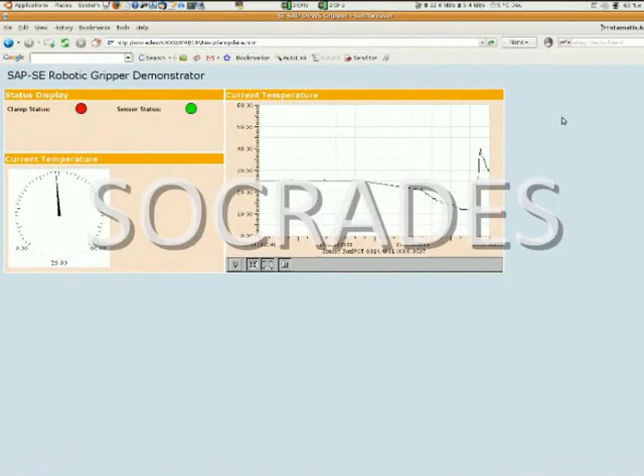SOCRADES is an innovative research project, partly funded by the European Commission, that pushes web service technology down to the lowest layer of embedded software with a focus on the industrial automation domain.

The project brings together a unique consortium of three major competing companies in the field of automation technology: Schneider Electric, ABB, and Siemens. Further, SAP, as the global leader in business applications, ensures close coupling of manufacturing with back-end business applications. In strong cooperation with academic thought leaders and highly specialized SMEs, this project defines new methods in hybrid automation by integrating resource-constrained devices to powerful back-end systems using web services.

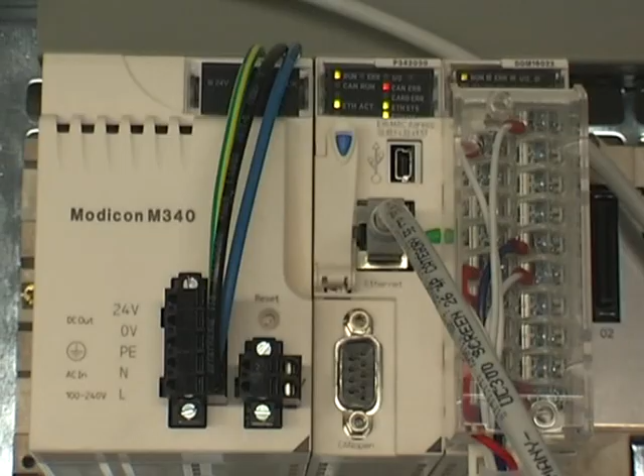Numerous communication standards exist today for the devices on the shop floor of a manufacturing company. Various protocols are used at different levels: between the sensors and actuators within a machine, among the machines that form a production line, and between production lines of a plant.

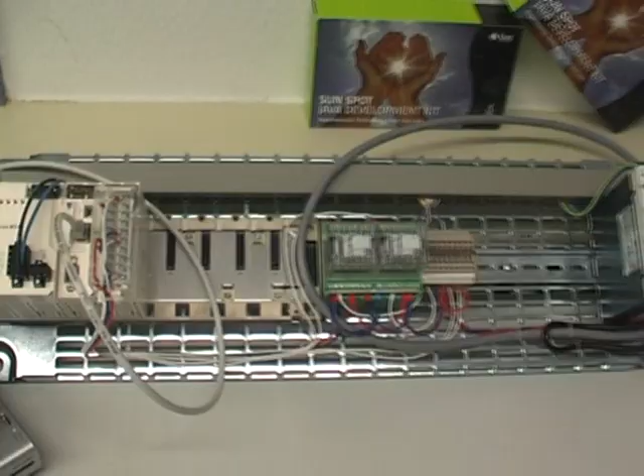Additionally, there is an integration gap between the production processes and the business processes of a company. Currently, this gap is addressed by proprietary connections using human integration, file transfer, or sending messages of homegrown formats. This creates inflexible interfaces that need to be maintained at high cost as the company adapts to changing market needs.

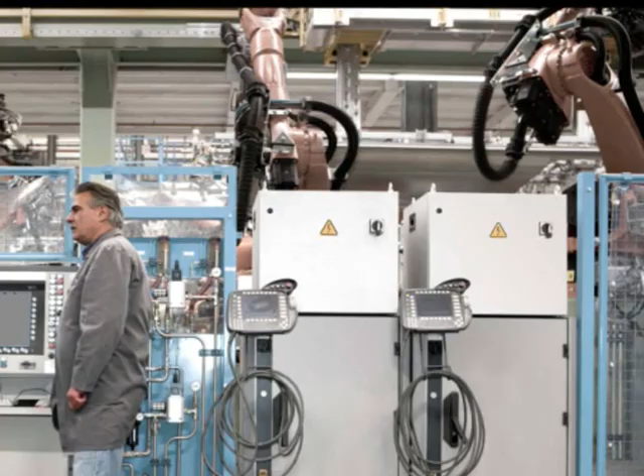Let's have a look at the production line of a multi-site manufacturer. One of the robots at that line recently suffered from a failure of the gripping tool, you could say the hand of the robot, which failed because of overheating. The production line had to be stopped for half a day until a replacement was delivered and the defect gripper had been exchanged. The global production manager learned about the incident only 2 days later via a phone call of an annoyed customer, whose high-priority order had been delayed.

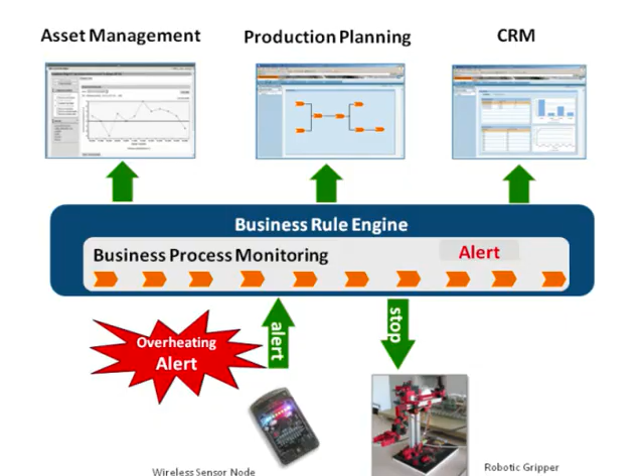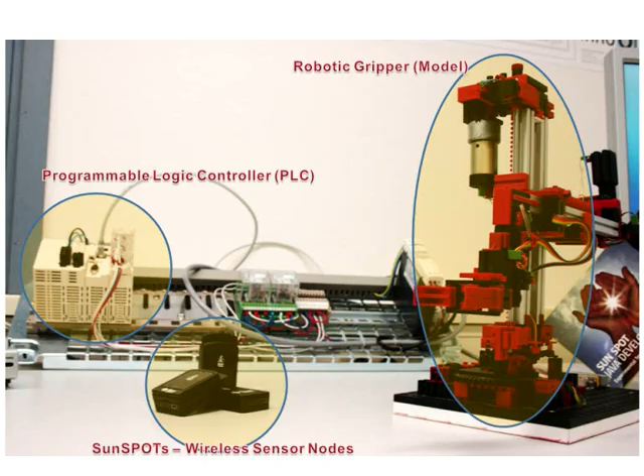If the company had decided to deploy only web service-enabled devices at the production line and to integrate them with their business processes, the situation would have been better. Let's have a look at a demonstration of this concept. We attach a wireless temperature sensor to a replication of a welding gripper. This allows us to monitor the gripper's temperature and to stop the machine before a failure occurs.

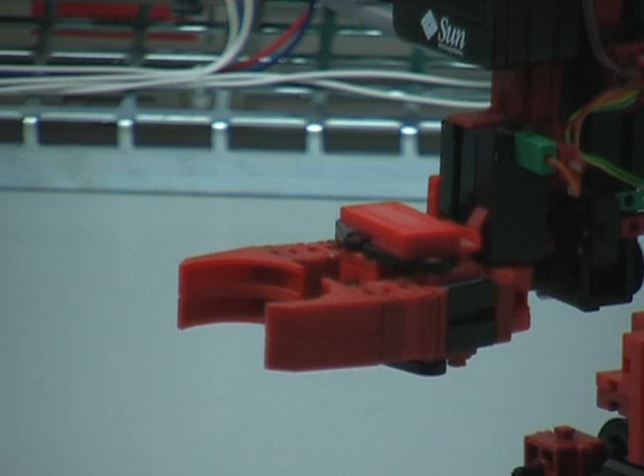The temperature readings are provided via web services. A client running on a PC connected to the same network receives temperature data from the sensor over the network. Similarly, another web service is deployed on the controller of the gripper to control and update its status.

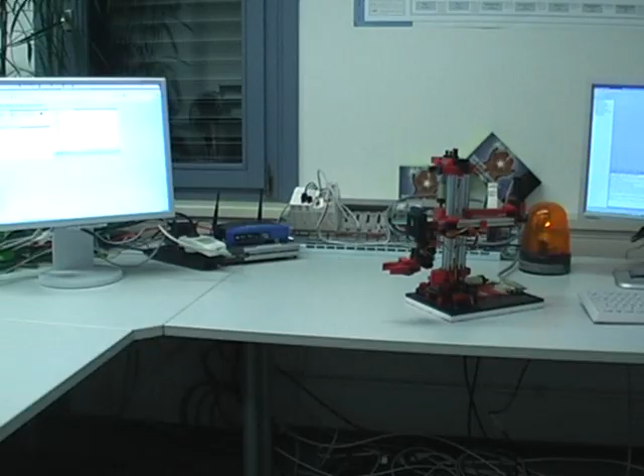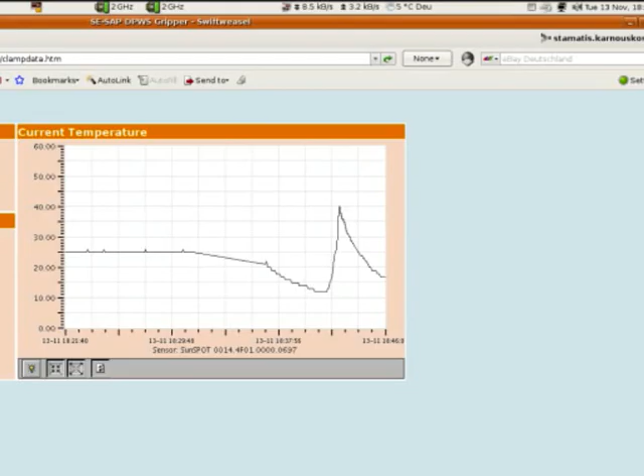We created a visual interface for the supervision of the production process to be displayed near the production line. A gauge displays the current measured temperature, and a graph visualizes the temperature history over a period of time. With the same tool that we used to create this visualization, we graphically modeled a rule that stops the production process if the temperature of the gripper rises beyond an operating limit.

We also implemented a web application that allows a global production manager to supervise all production sites at a glance. The use of color coding visualizes the current status of each site at one glance. You can zoom and pan the map interface.

To demonstrate the global web service collaboration, we simulate the overheating of the clamp using some high-end equipment, also known as a hairdryer. The rising temperature values coming in from the sensor trigger the rule. This stops the production process on time by invoking the stop operation of the production process web service before the gripper would be damaged due to overheating.

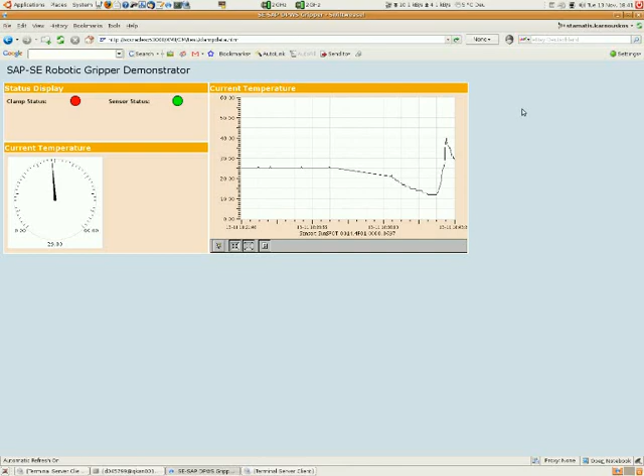The error is shown on the process visualization tool where the clamp status turns to red, and it is displayed on the production manager's overview screen. She can immediately identify the factory by color and tooltip notice. From there, she can jump to the alert history of that place, showing the errors that have recently occurred there, and get to the Resolution tab that offers actions to compensate for the problem. It shows the orders affected by the production stop.

For each order, the production manager can choose to notify the customer about a potential delay by directly jumping into the customer account in the CRM software, to procure a substitute item if the order is really critical and the customer cannot wait, to create a maintenance order that will trigger a worker to take care of the task of fixing the situation, or to access the device's record in the asset management system that has all relevant contacts to the manufacturer to call for external help or guidance.

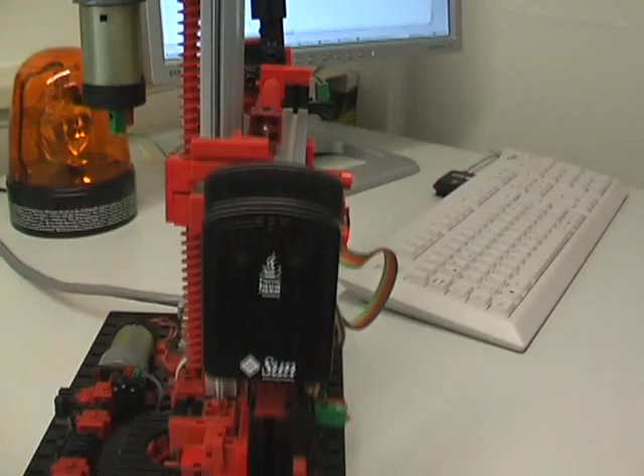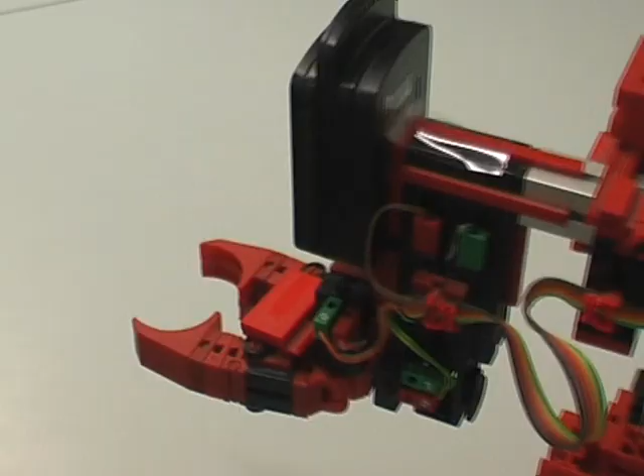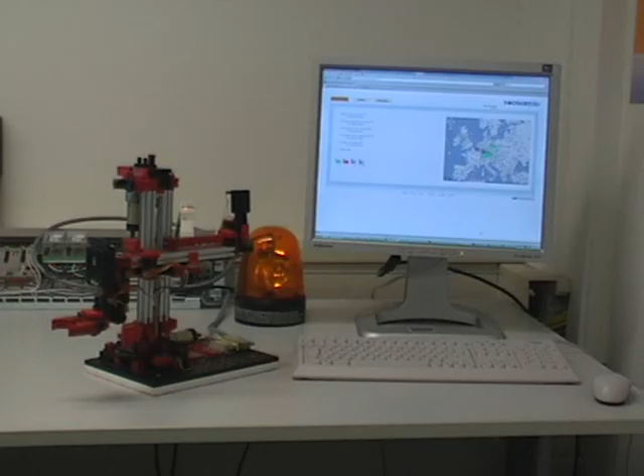In our demonstrator, we use, just like you would in a real setup, a robot equipped with a web service-enabled gripper that is controlled by a PLC and a SunSPOT, which hosts a wireless temperature sensor that can be programmed in Java. Both the PLC and the SunSPOT offer their functionality, that is sensing temperature, opening and closing of the gripper, as web services. We combine the fine-grained services from the gripper into a high-level service that encapsulates the production process, offering, among others, operations to start and stop the production and report events such as failures.

On the backend side, we use SAP XMII, a product which runs as a service in SAP NetWeaver that allows you to visualize shop floor data and to graphically model and execute business rules based on that data. Our rule can be triggered manually or automatically based on events or changing sensor values from the shop floor, or periodically at intervals. The Production Manager's view was developed as a web application in Ruby on Rails, integrating Google Maps.

To implement the device services, we used an advanced web service framework tailored for deployment on devices. It implements the Devices Profile for Web Services, or DPWS, which is a selection of web service standards, including WS-Discovery for dynamic discovery of web services and WS-Eventing for a publish-subscribe system for events. DPWS support is built into Windows Vista, so the services offered by the robot and the SunSPOT and the production process service are visible and accessible via Vista's network neighborhood.

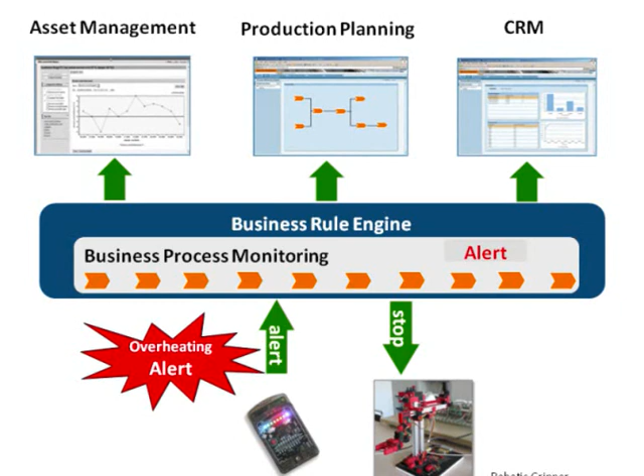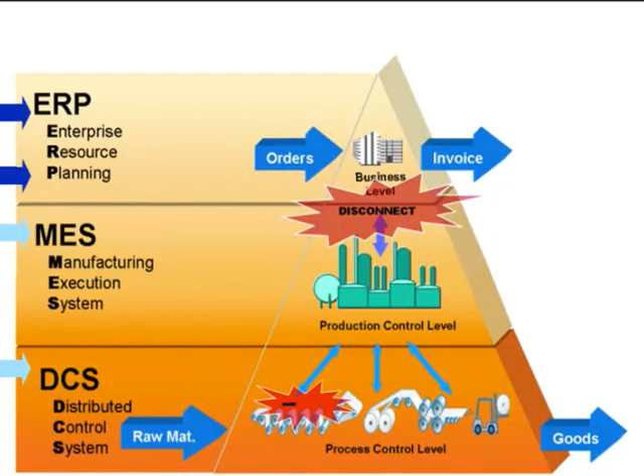You just saw how web service technology on the shop floor can be used to tightly integrate shop floor processes with back-end processes. Such integration would be possible also with proprietary communication standards, but the interfaces would have to be maintained at high cost. Web services make the technical part of the integration trivial, abstracting from hardware, operating systems, and programming languages.

In further steps of our work, we will investigate how different web service technologies tailored for manufacturing, such as DPWS or OPC UA, can be combined for maximum benefit. We will identify and trial further use cases for tight shop floor to backend integration.